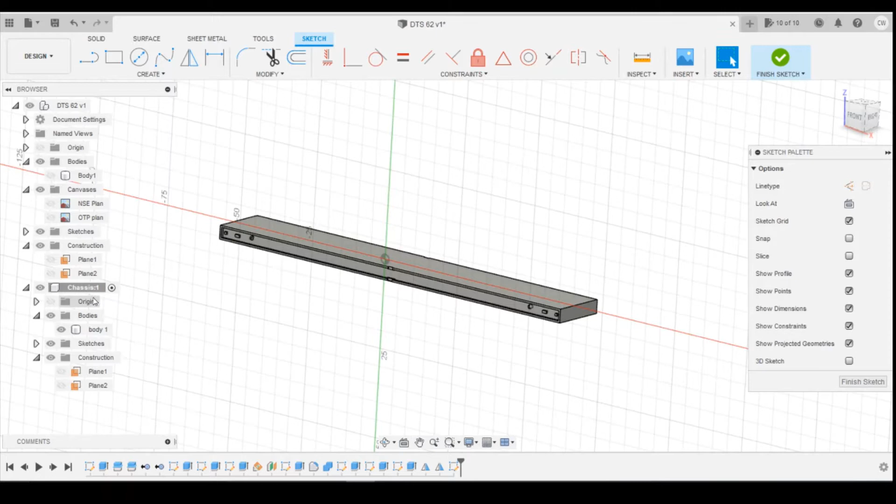and a number 2 end because the two cabs are slightly different sizes. The first thing I'm going to do is create two components for the two cabs. I'll check the radio button to make sure we can back up to the top, right click, new component, and name this number 1 cab, and click OK. Then I'll come back up to the top and do exactly the same: right click, new component, number 2 cab.

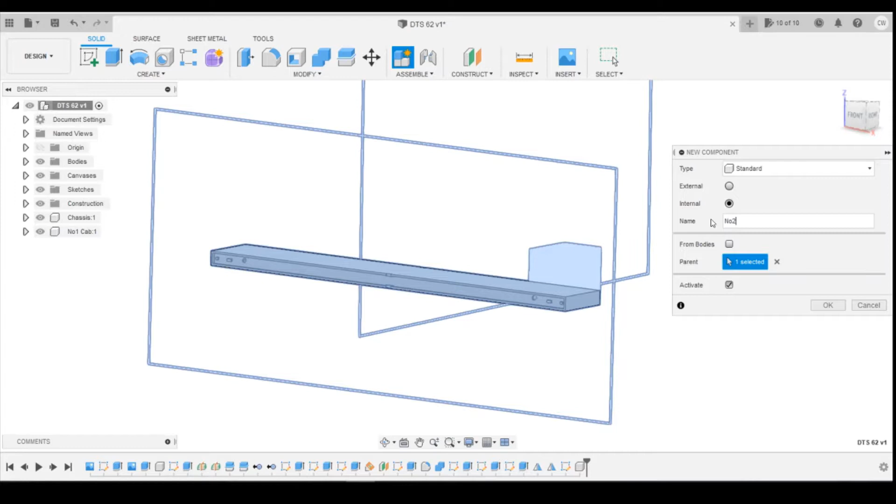Okay, so now we've got our two cab components. We can start making sure we're drawing the correct ones so that we know we're on the correct end of the unit as we draw it.

If we look at Paul's sketch, on the number 1 cab we've got 98.5 inches from this end of the cab up until the end of the buffer beam here. And on the other end we've got 71 inches, again from the end of the cab to the end of the buffer beam. So we've got 71 and 98.5 - those are the two measurements we're going to be working from.

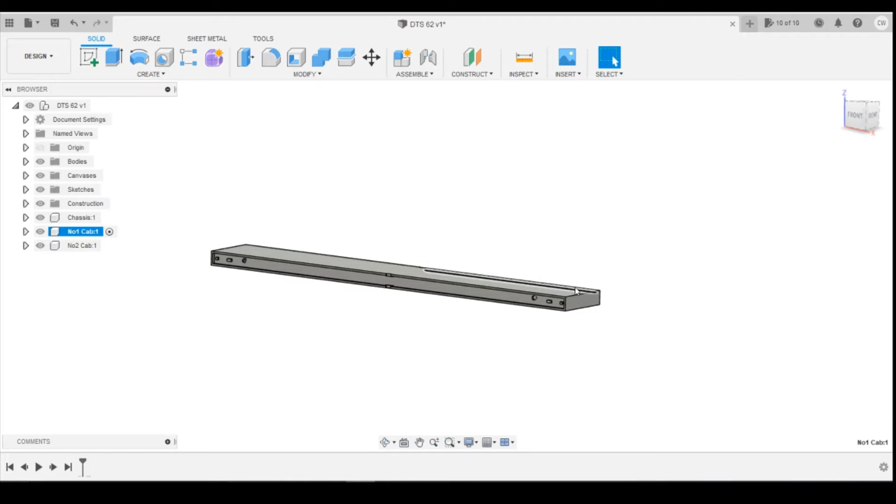So using the number 1 cab first, we're going to draw it on this end of the model. We're going to have the canvas turned on for the side-on view and make sure you've got your number 1 cab radio check button selected.

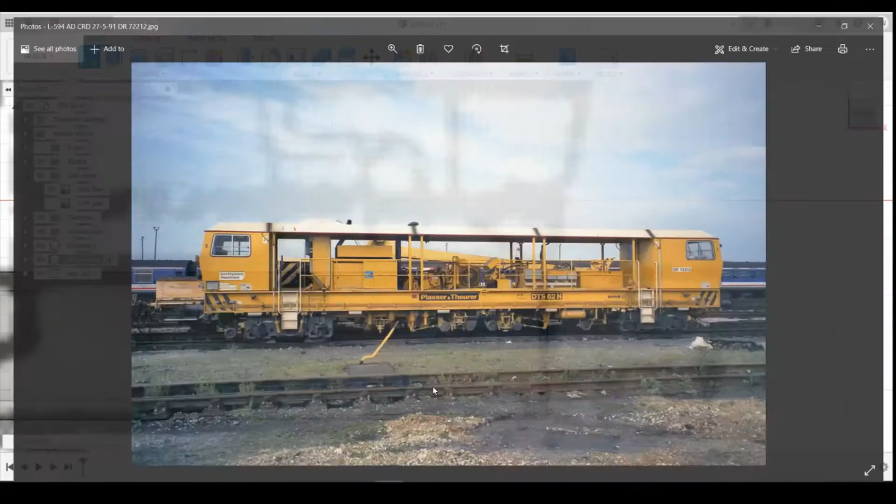I'm going to create a new sketch and zoom in, and we're going to sketch on the outside of the sole bar here, because if you look at the model, the cab is pretty much level with the outside of the sole bar.

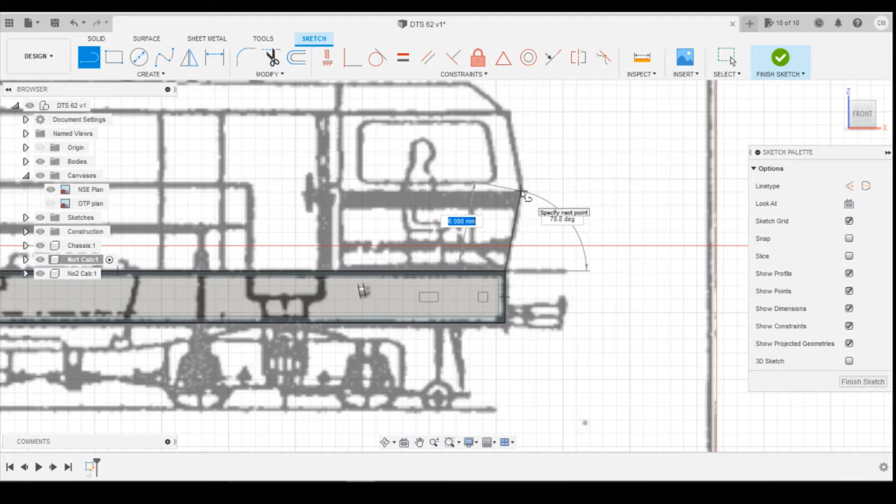We'll create a sketch there and then trace around the outside. We're going to start in this bottom corner - there's no overhang really on the front here. We'll come up to the point of the cab, which is about there, and then come up to the next one.

Try and make sure these blue lines are snapping. I try not to... although if we have a look at the side-on view, I don't know if that is potentially level - that point there and the 2 point, yeah, I think we might draw that as in line with the end of the buffer beam.

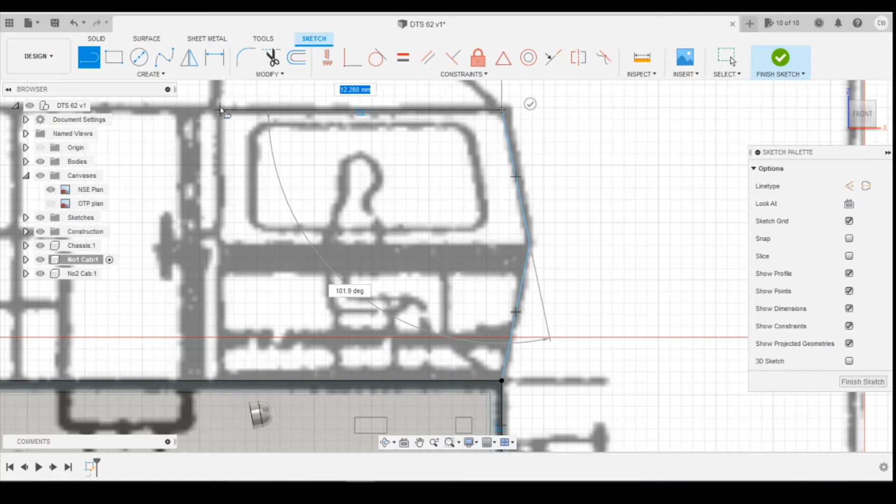Okay, and then we'll draw this line down - it'll automatically snap to the bottom there. And then you can see how that's automatically closed off because it's changed colour. I'm going to define that angle, and then define that angle, and that will close those two parts off.

And then if we look at the plan, we can have a look around to see - so we've got 35 inches, which is pretty much the halfway point. Looking at that, that point is at the halfway point.

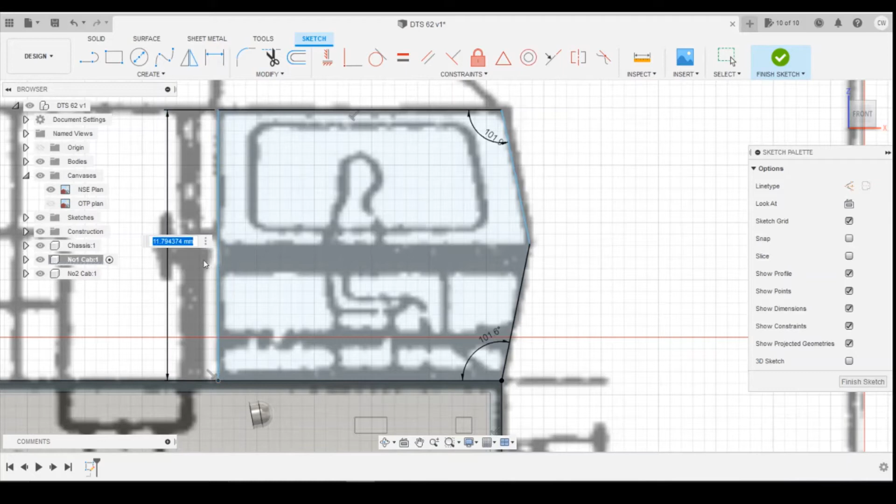So how we can change this then is if we define this edge - we know that this has to be 70 inches, and we know that from looking at the plan on Paul's sketch here. So we know that's 70, and we've got 35 inches as the halfway point. So if we go into our calculator tool here, stick 70 inches in,

we know that it's 1778, which is going to be the height of this line. So if we do - what was the number there? 1778, divided by 148 because we know that's the N gauge we're working to. So you can see how it's lifted it up slightly.

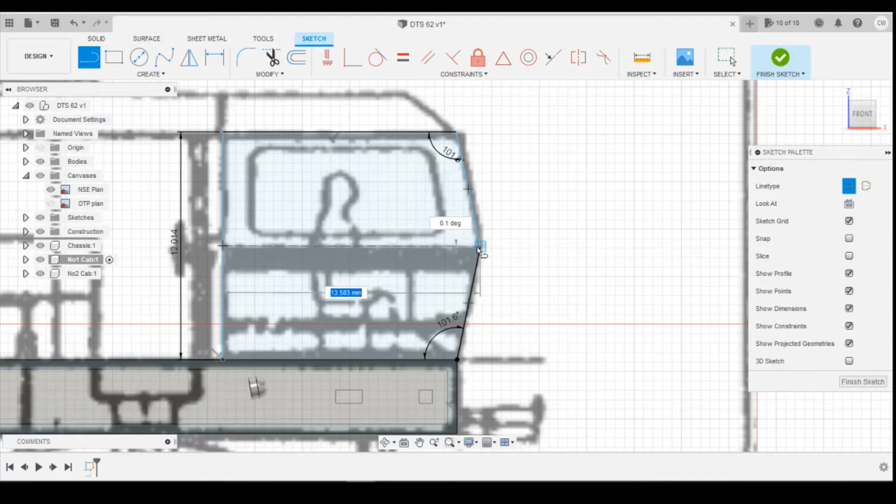Okay, what we need to do now is find the midpoint. I'm going to draw a line as a construction line across, and you can see that pretty much we've got that point spot on, maybe, by the looks of that.

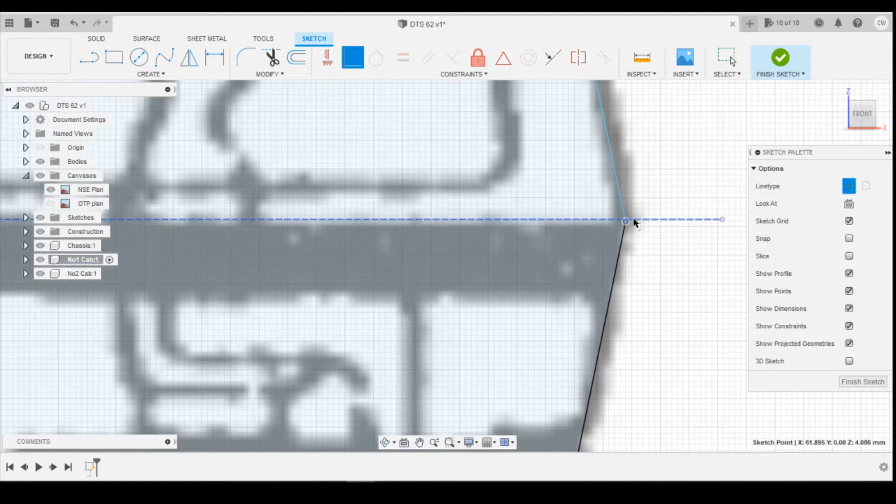Okay, and what we can do is constrain that point to that line, so that point now is at the midpoint. All we've done there is turn this into a construction line and then added that onto the midpoint there. We can finish that, and change that back out of the construction line.

Okay, so we're looking at the number one end, so we need to look at the measurement here - we've got 98.5 inches as the defined measurement from the end of the buffer beam to the end of the cab. So if we check this again, it's 50 plus 41 plus 7.5, so yeah, 98.5 inches.

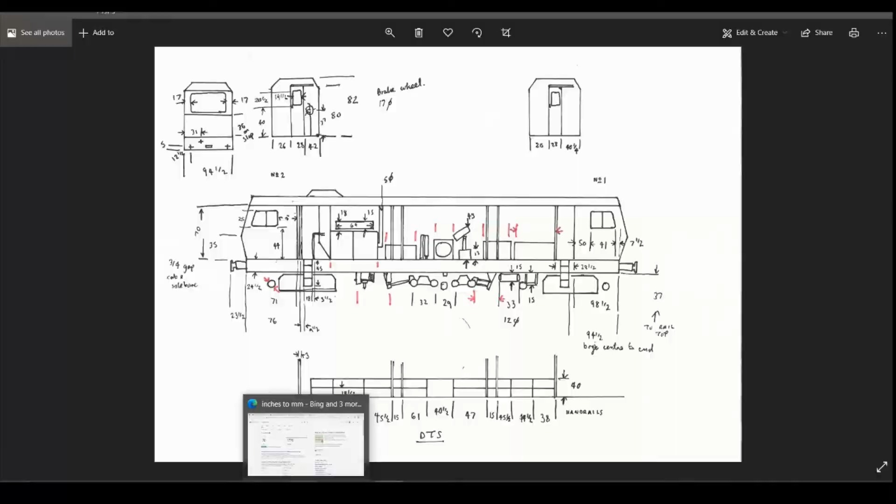So again, we can jump in here - 98.5 is 2502, near enough. We can define the length... let's escape that. We're going to draw a line along here just to close that up, and then we can define that length - sorry, what was that we said? 205.2.

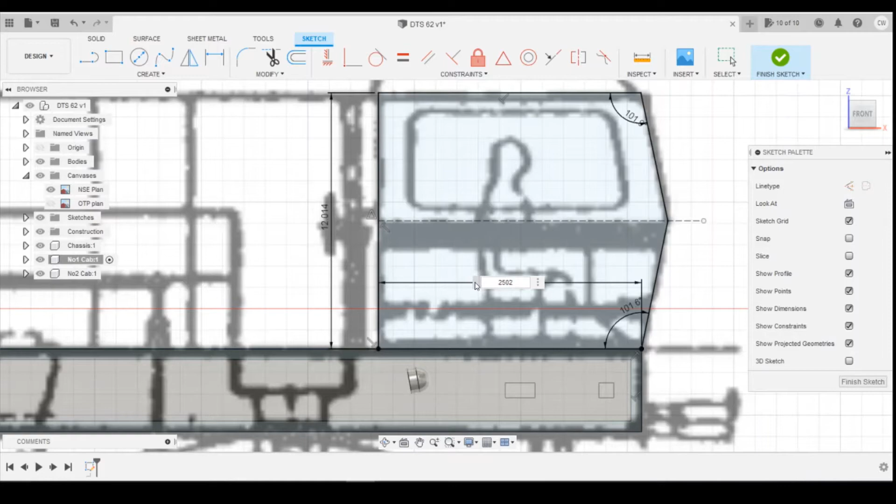Okay, you can see what that's done to the length of that cab now. And that doesn't match the plan at all, which is a little bit annoying, but these are things that are sent to try us.

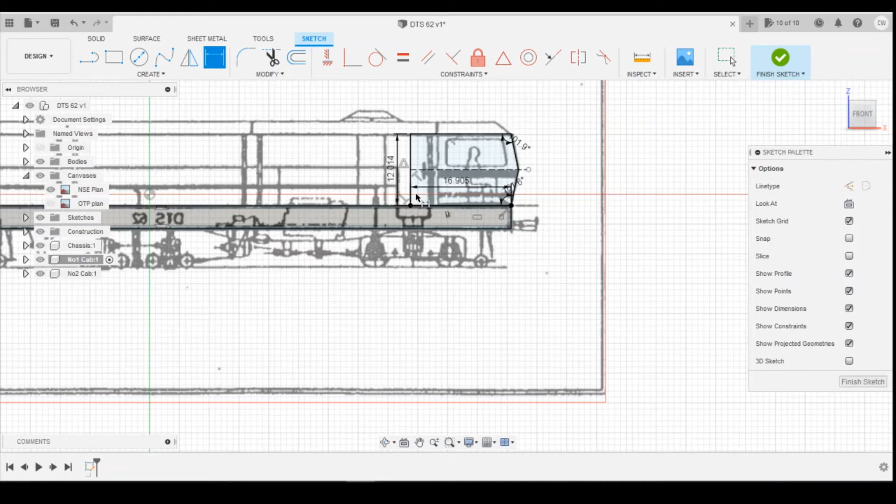We do know that it's pretty much in line with the center point of the axle here, and this one's got a center point there. So you can tell that's not going to match the plan, and there you go, that's the center point of that axle. Let's just have a quick look.

One thing we might want to do, if we finish that sketch a second, I think this plan might be the wrong way around, looking at where that hump is, because that hump on the roof is above the engine.

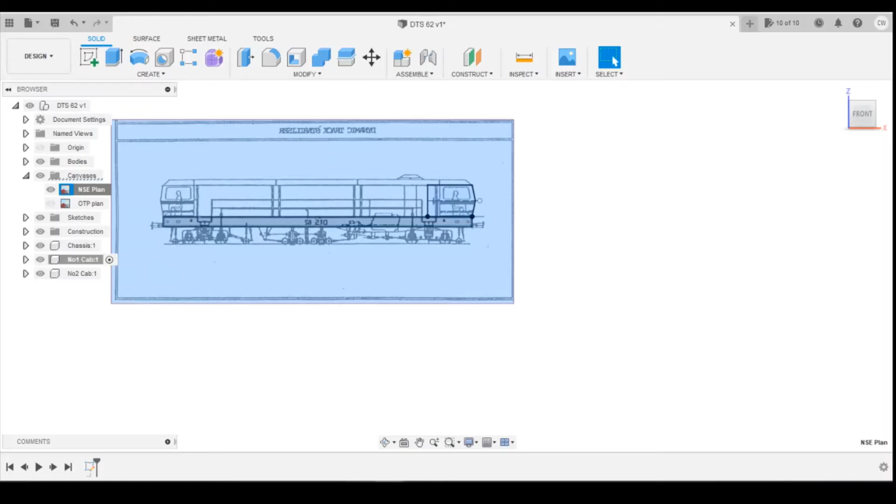We go into the plan, edit canvas, and we can flip it round. Again, I don't think that's going to make much difference looking at that, because the cab doesn't finish in the right place on there. So I'm just going to leave that as it was this way round.

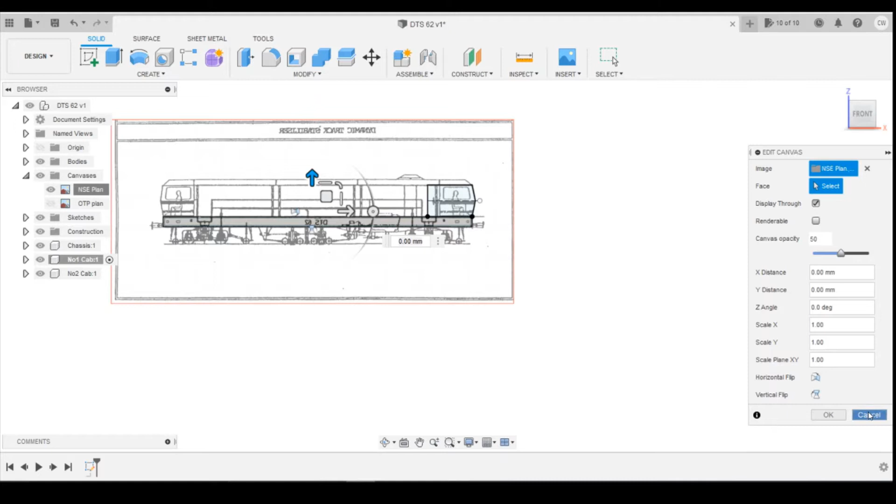So we've got our profile now for our cab. We can extrude that, and we're going to extrude that across to the other side of the chassis here. Okay, needs to be a new body. Make sure you're not joining into the chassis unless you really, really want to. But at this point, I would suggest that you don't, and we keep that as a new body.

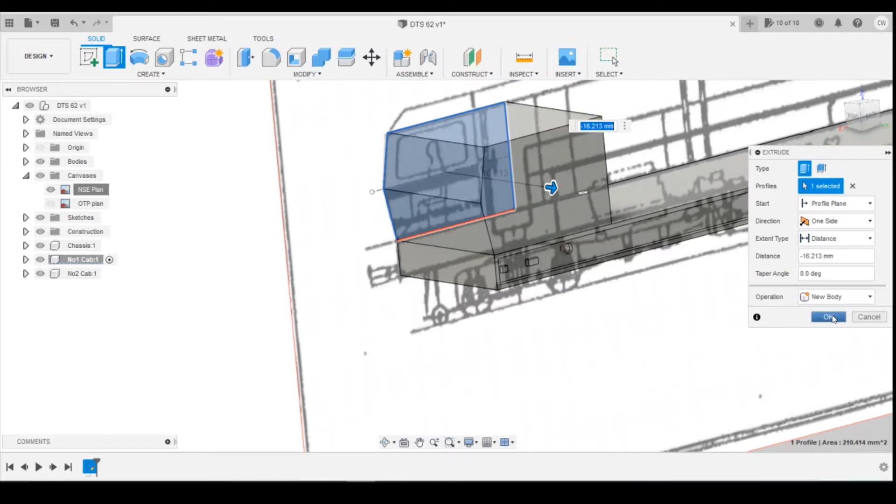Okay, so we've now got that cab there. What I'm going to do is copy that into component number 2, or cab number 2, and then change the length of it. So if we open that up, select the body, right click, and then move copy.

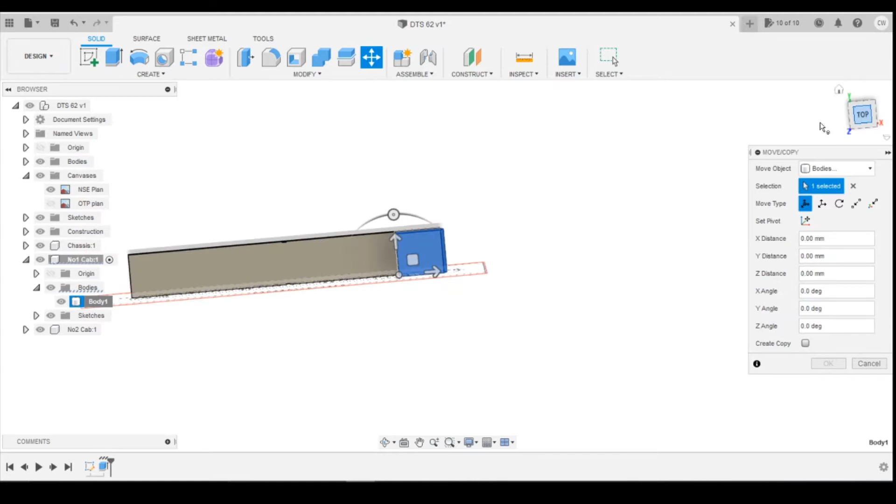The first thing we're going to do is... oops, let's undo that. Create a copy first by ticking the checkbox there. Spinning it round. Let's put it in there. Let's spin it around, move it, and then we'll try and move it across into this component here.

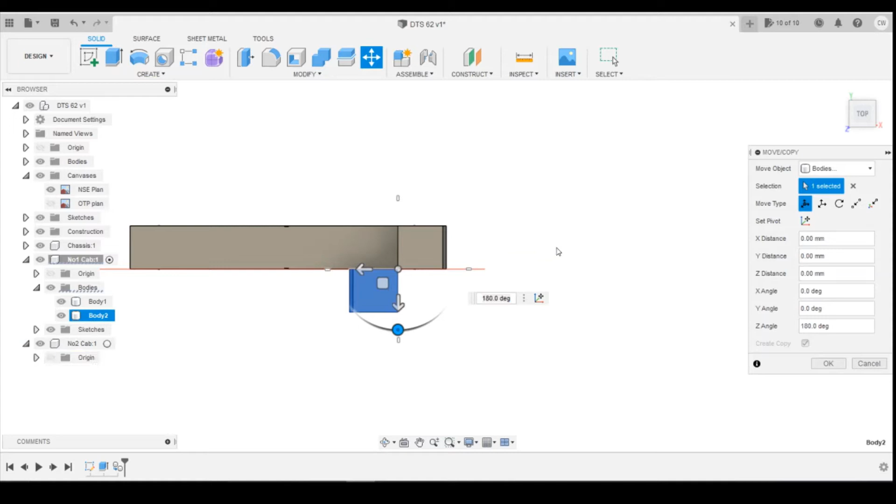No, let's not do it that way. Let's go right click, copy, come down to here, select that, right click, paste. Now we've got the body within that one. That's what I'm after - probably the cleaner way to do it.

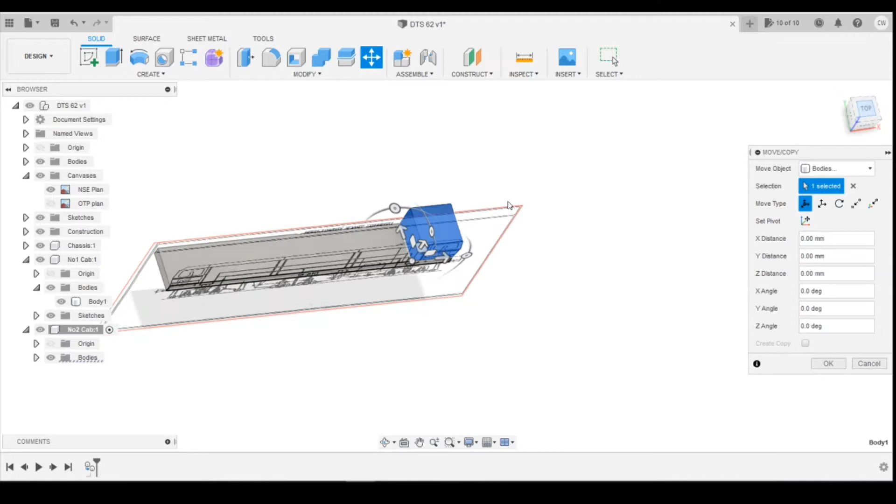So we can spin that round 180 degrees, so it's now the correct way around. If we turn the canvas off, what we can then do is point to point, select this corner here on the cab, and we know that's got to match up to that corner on the chassis. Click on OK.

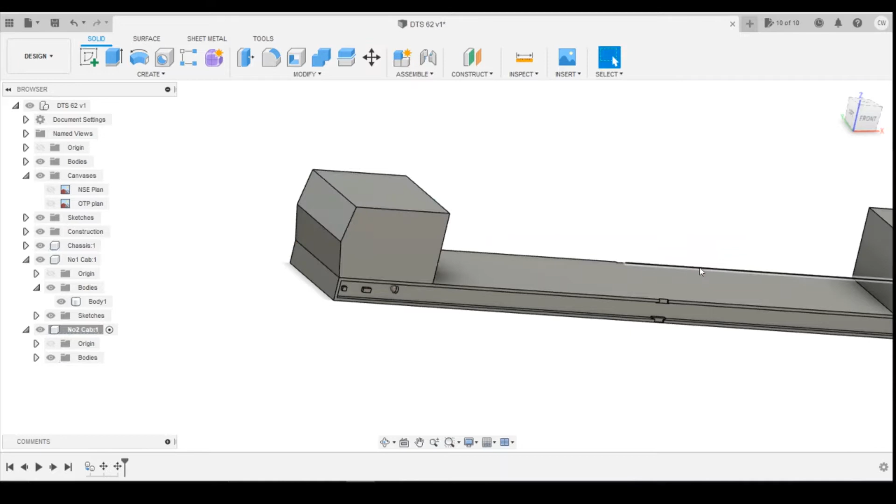Okay, so what we now need to do is define the length of this, because we know that this cab is a completely different length to the original one. This one is 71 inches. So if we go back into here, do 71 inches, it's now going to be 1803.

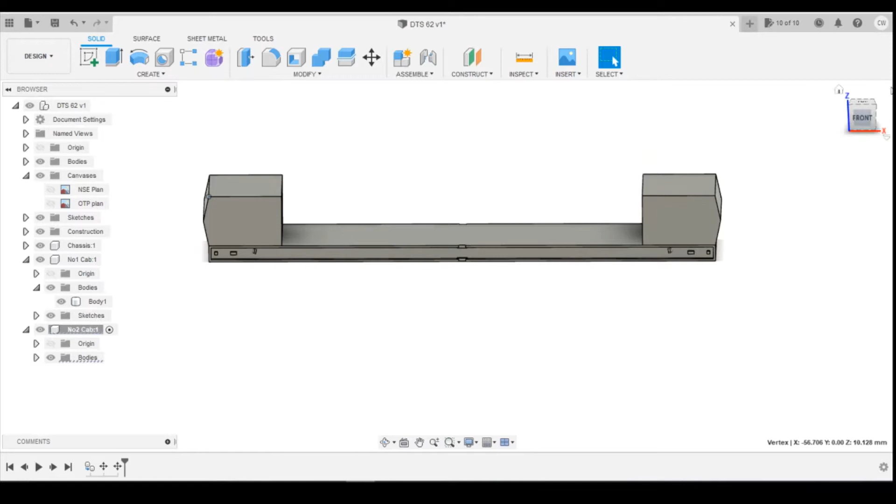So come back into Fusion. Okay, I'm going to turn off cab number 1, I'm going to turn off the chassis. I'm going to create a sketch on the top of the cab, and we're going to do a rectangle.

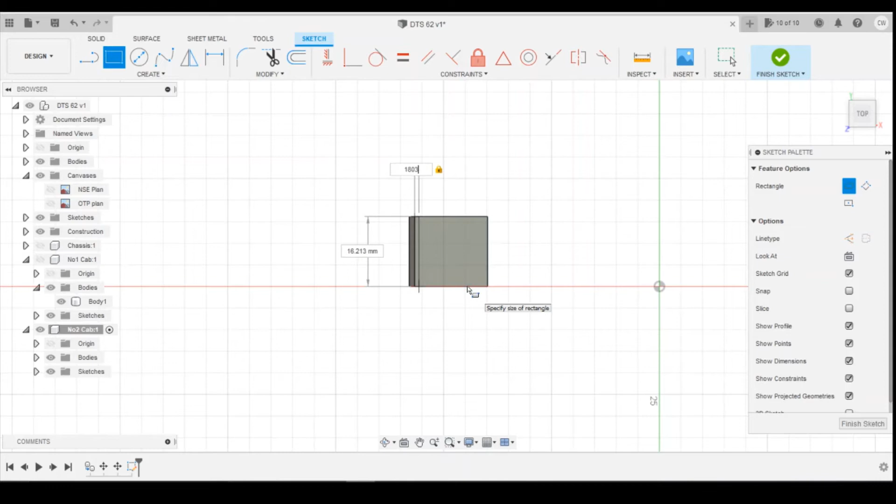Okay, and we know the length was 1803 divided by 148. Okay, width is already going to be snapped to the other side. And what we've got left, this extra bit, we don't need, so we can just extrude that through to the bottom side, get rid of that, and we've now got a cab that's different length on this other end.

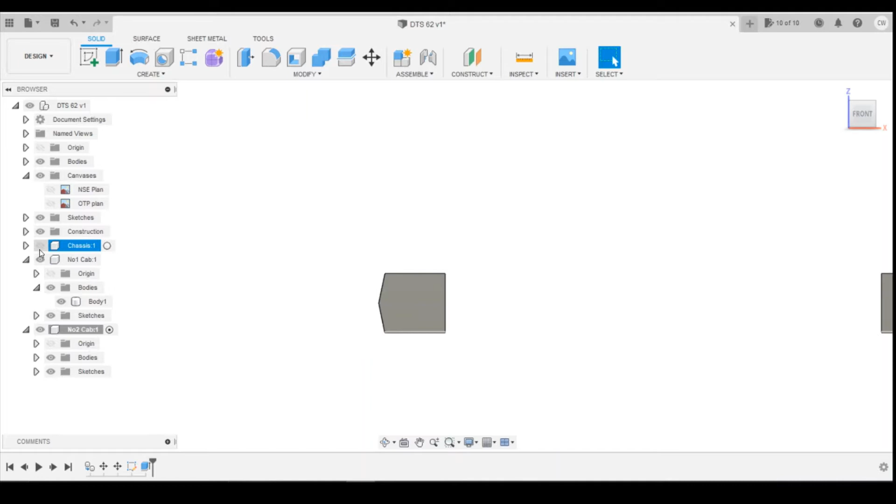Okay, if we turn these back on, you can see we've got our two different length cabs, which is exactly what we're aiming to get.

I was thinking, I'm wondering if it's worth going back a little bit in the CAD and just changing how we've done these cabs - like keeping what we've got, but just maybe adding things like the windows and detail like that. It will mean that this cutting off the end might be slightly different, but we can get around that.

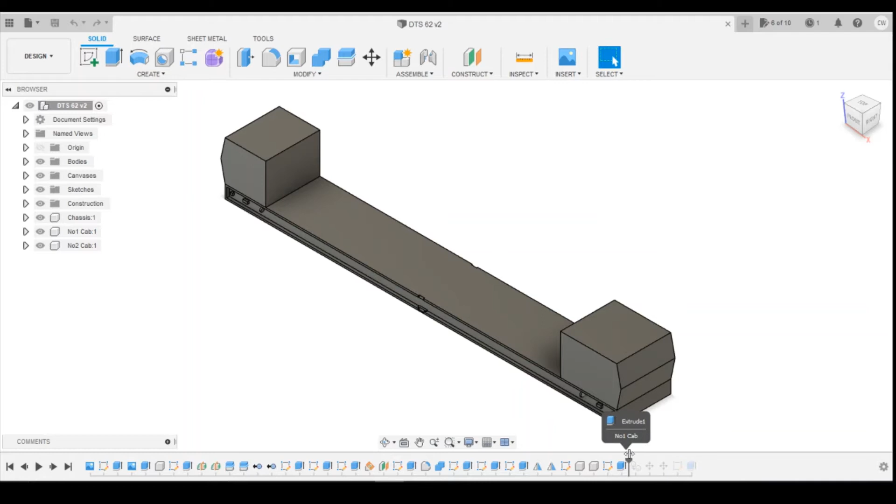So let's go back in the history, let's turn the chassis off because we're not going to need that, and we'll make sure that we've got cab number 1 turned on.

I think let's go for a shell on the bottom surface. Let's give it a wall thickness of 1mm.

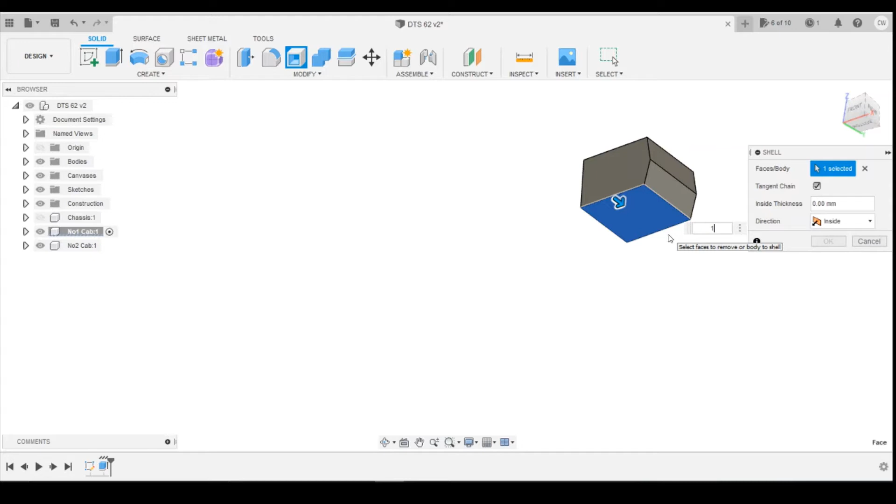And then I think I'm also going to... no, I'm going to keep that roof, I think. Okay, so we've got the shell.

What we can do now is draw the cab side windows in. So if we look at these measurements, we'll do that with a combination of pictures. Let's have a look at the cab windows.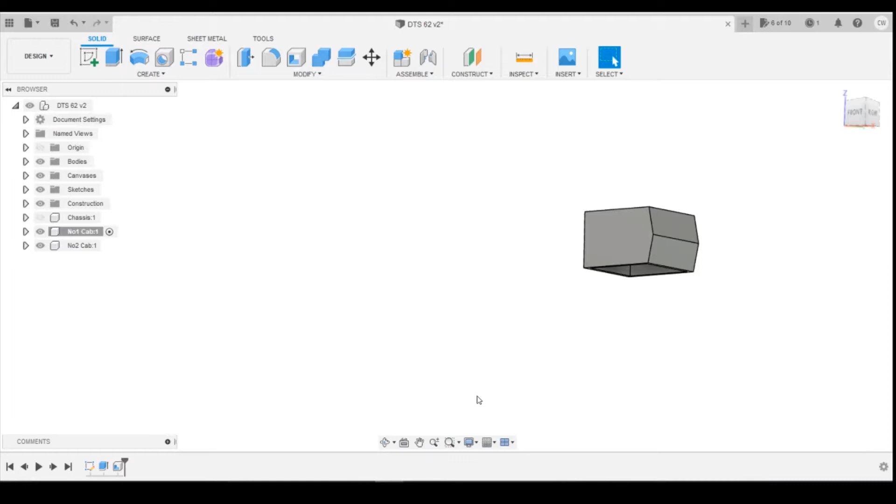So we can see that we can start off with probably a basic rectangle and then put an angle in on the side here and then curve the corners round. Let's have the canvas on, that'll give us an idea of where the window is.

Okay, so let's start a sketch on the side wall here, and we'll just put a rectangular shape in to start with.

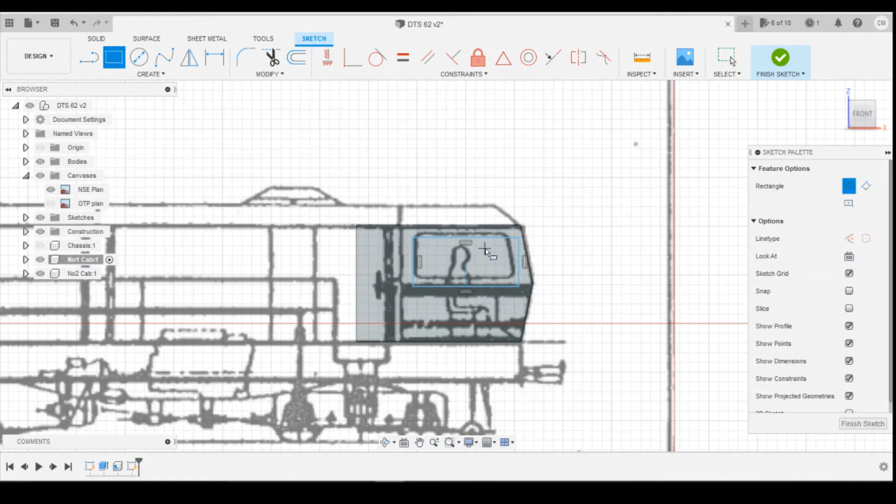Okay, so height of the window is 25 inches and the length of the bottom is 41 inches. So if we jump into our internet here, 25 inches is 635mm. So we can define that height there. 635 divided by 148. And we said the length was 41, which is 1041.4.

Okay, so we've got 4.291 up on the height and 7.036 there. So this has got 50 inches from the end of the window to the back of cab. 50 inches is 1270.

1270. Okay, so that's the position of our cab, which is massively different to what the plan is, but to me that plan window does look really, really big.

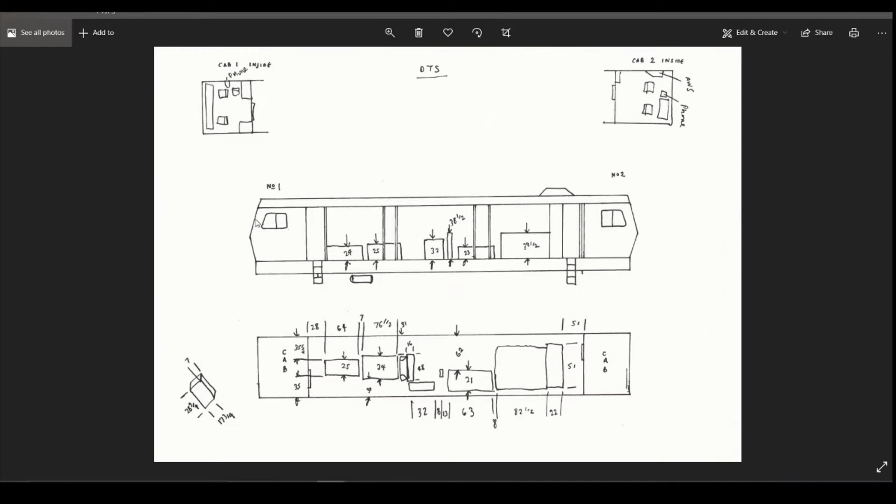Let's have a look at angle here, see if we've got anything with a draw. So it's got to have parallel lines with an angle. Yeah, okay, that's the line's got to be parallel.

So if we draw a line from there up, make sure it doesn't snap to anything because you don't want it to. You need to now go and click escape. We can then select parallel line, that and that, so the two will match there then.

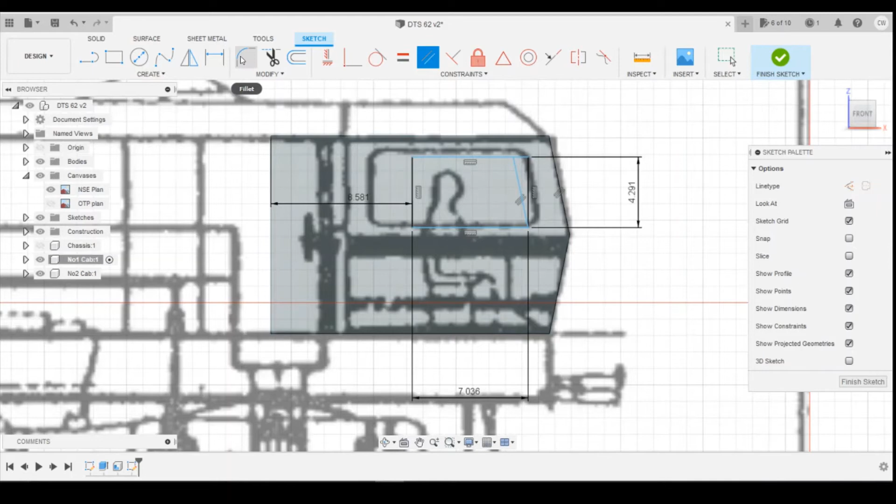Now if we look at the photographs, you can see that all four corners are curved, which is helpful. So we can just do the fillet, they look like they're all curved the same. So if we hold shift down as we select... okay, so we're going to curve them.

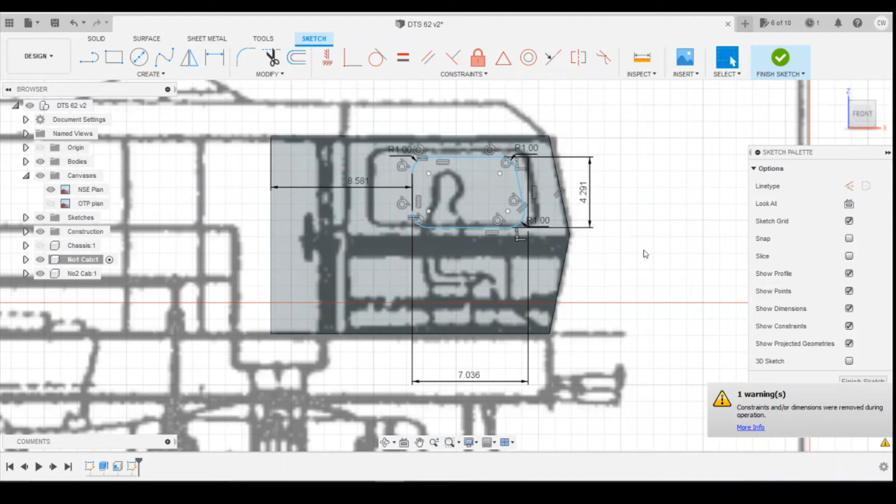I think I'm going to go with that 1mm, it's just giving me the option of. Let's work with that. So we're going to curve from there to there, 1mm, and curve there to there, 1mm. Okay, so this warning here is because we've curved this, so this constraint no longer matches to the end here. Just try and work out whether that looks okay, if I'm happy with that.

I'm wondering whether that measurement there is to the bottom corner, from sort of there to there, or from there to there. That one's definitely 50 inches, so that's fine. It's this gap here.

Let's have a look. If we do a dimension from there to there, it's telling us it's about a foot. Does that look about 12 inches? Maybe not, maybe it's a little bit smaller. It's difficult to tell, really.

Need to work out the height here. Let's see if that's on the plan. That's why it's not constrained. So 44 inches, I think that says.

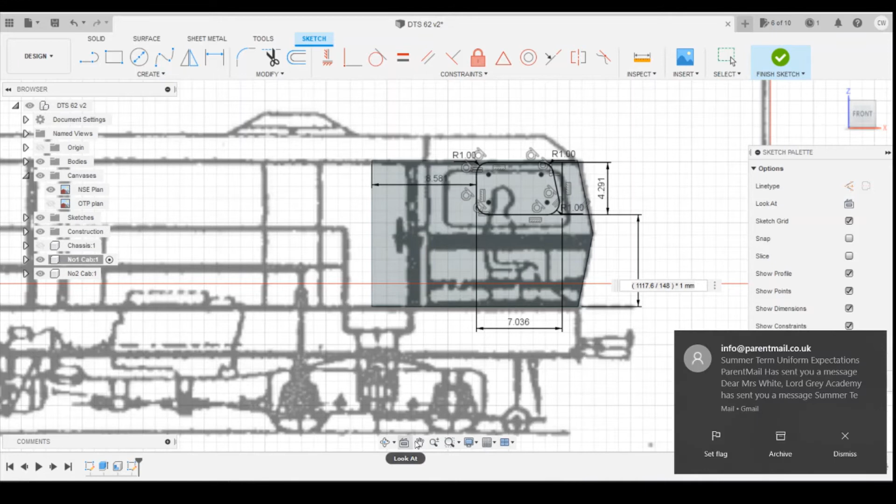1117.6. So there. 1117.6 divided by 148. Either something's not right there. Yeah, something's not right there. That can't be 44 inches.

Right, let's have a look, try and work it out from maybe this door. So we know that's 40 inches there. See if we've got any photos that sort of show. Yeah, look at that, that's exactly the same height. So let's try working that out.

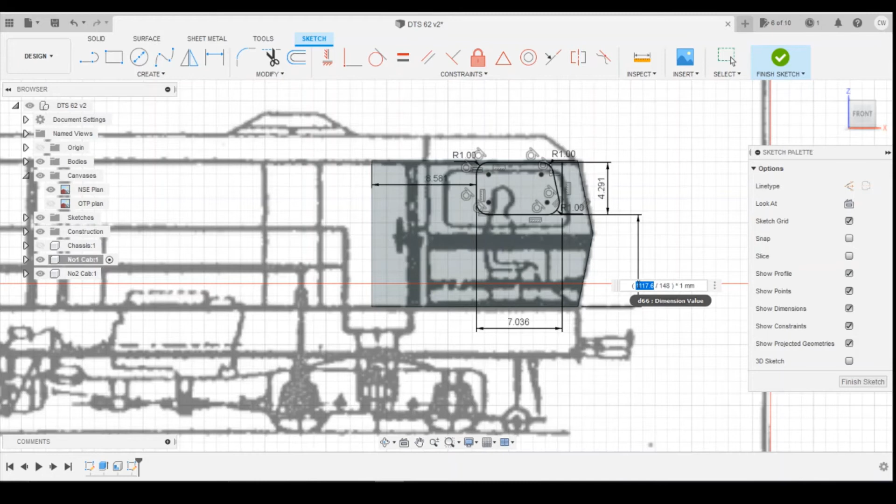Let's try that at 40 inches, so that's 1016. That looks better to me. I think that measurement on the plan was wrong, because that looks like a much better position there. I think I'm going to go with that as my position.

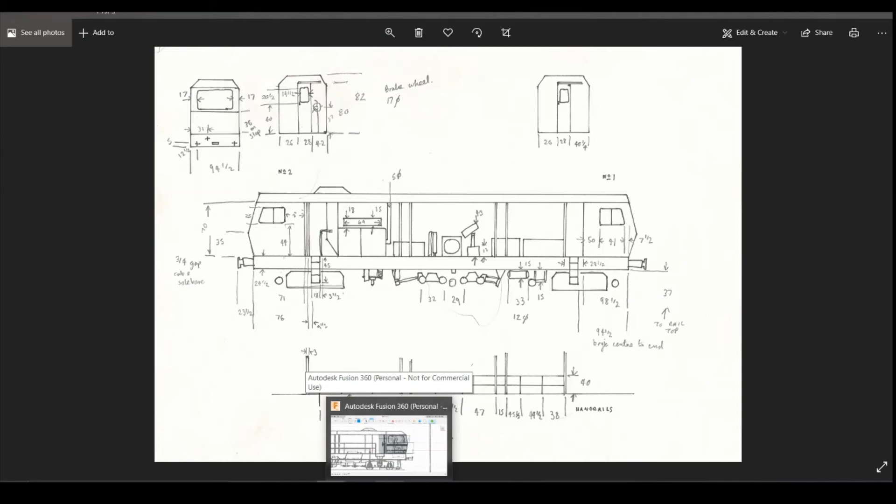Now, again, looking at the plan, all the windows are identical. So what we can do to make this nice and simple, we could put these uprights in there. Yeah, let's do that. Let's have rectangle.

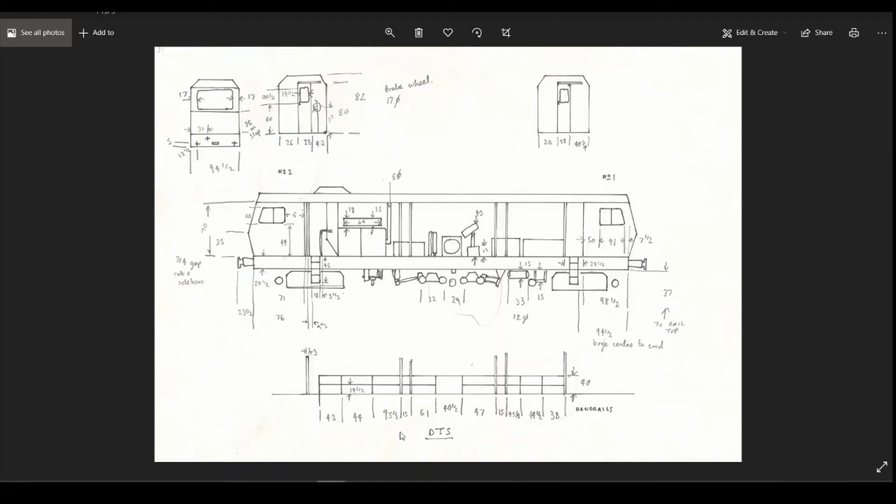I don't want the middle constraint. Although there's no measurements of them, I can see there's no measurement of where it is. If we look at the picture, it's probably in the middle of the top, not bottom.

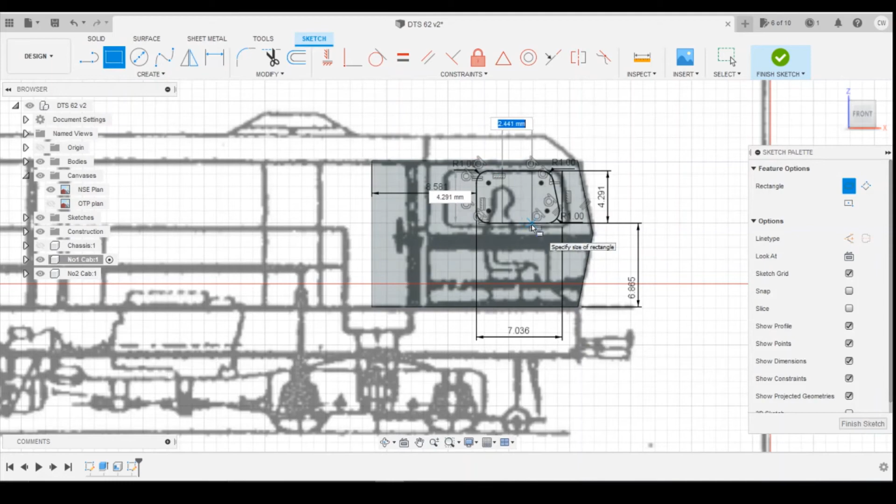So if we draw a rectangle, quite a large one, and if we use the midpoint constraint, constrain that to the midpoint of the other one, and then when we define this, I'm going to go for 0.5 millimeters in width. That's going to put this midpoint of this rectangle on the midpoint of that upper level.

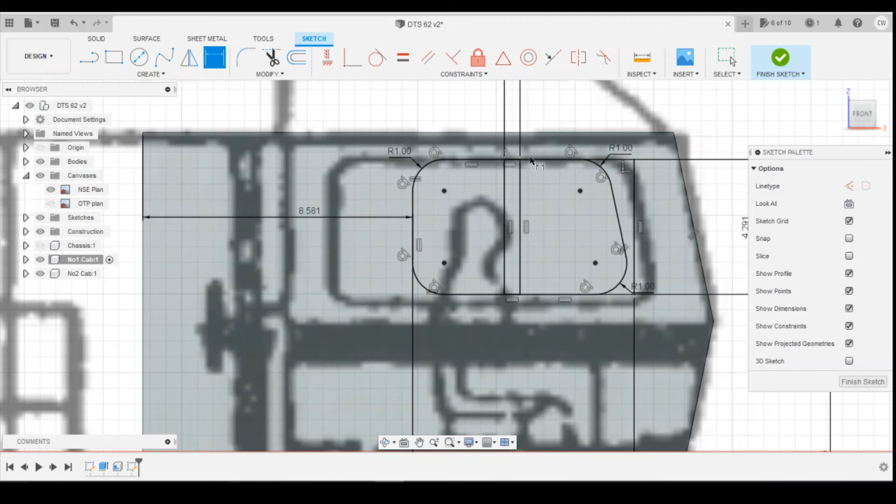Then we can select those two panels and extrude them. And if we come all the way to the other side, that will cut all the way through the model.

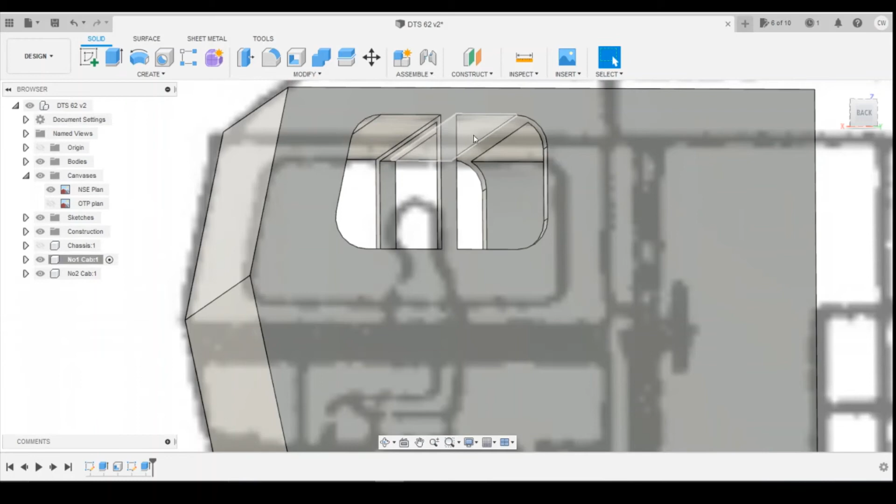Okay, so what we've got here is, because we've got a millimeter shell thickness, this actually cuts slightly into the roof, which is fine, we can live with that. I'd rather not, but we can.

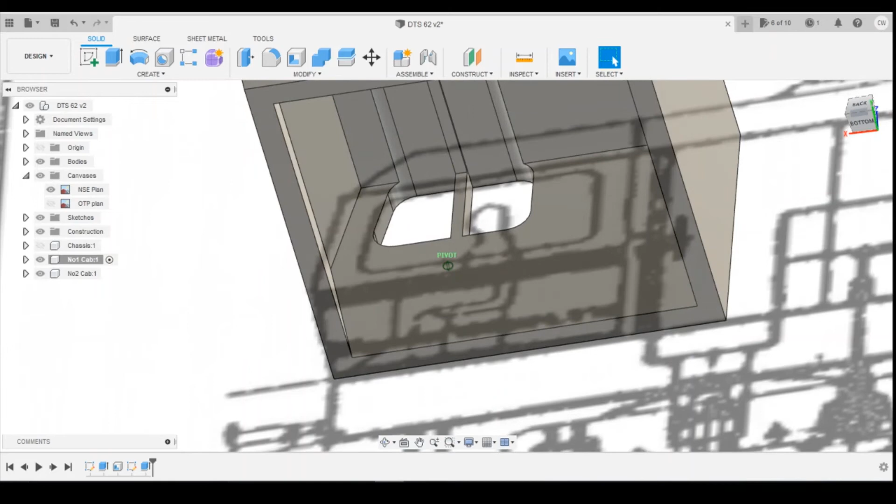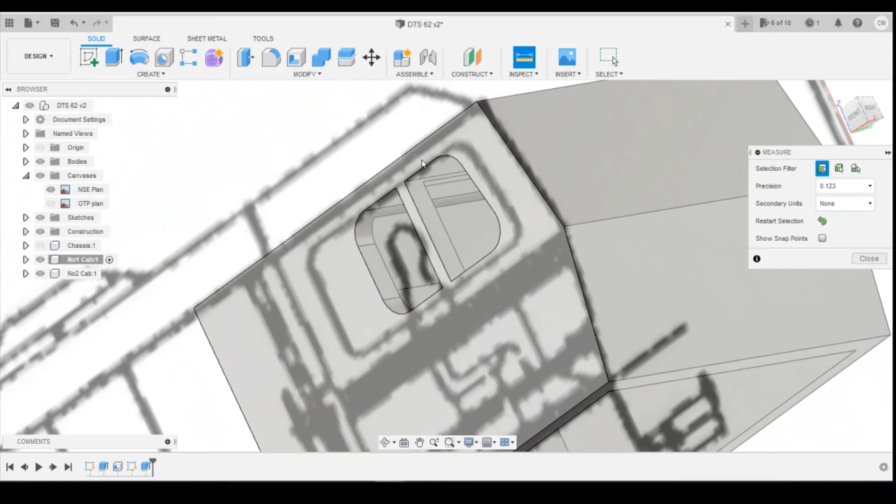The problem is, if we do anything about it, it would show through the window. We could make the wall thickness smaller, but that would risk the integrity of the model, so I'm going to live with that. You won't notice it again, but it's on the inside. Let's measure the distance from there to there - 0.1 of a millimeter. So yeah, you're not going to notice that.

Okay, so that's the cab window done. We're now going to need to do the cab window on the front. Let's have a look at the picture here.

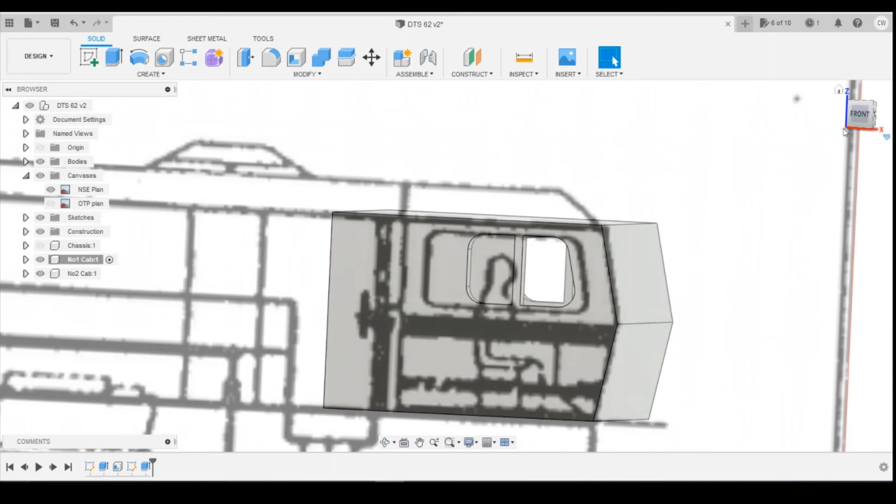Now, if we were to draw it directly on the front panel, when we extrude in, it will extrude in at an angle, and then your framing would be showing at the top, because you'd have the back of the panel showing downwards. So if we create an offset plane and extrude directly in a horizontal line into it, then you don't get that effect.

So if we do an offset plane off of the back wall here, and then drag that beyond the front of the model, click on OK. We can then draw directly onto that plane, which is then going to be based directly onto that model.

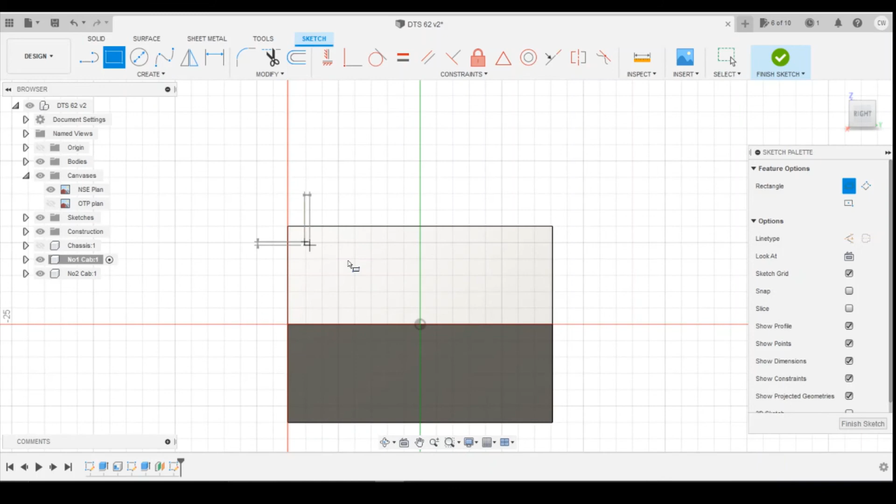Okay, so if we look at here, we've got 17 inches either side. So if we could draw a rectangle like that, and then we want 17 inches, which is, let's go for 432 millimeters. So we can define the width.

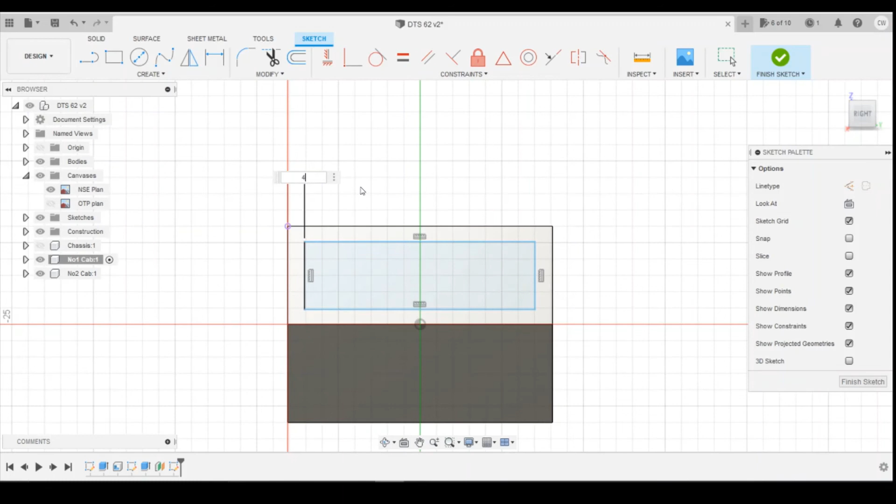We're going to have to do from the corner to the corner. Say 432, so it's 432 divided by 148, that's 2919. Drag that back in. Define from there, that corner to that corner, as 2.919.

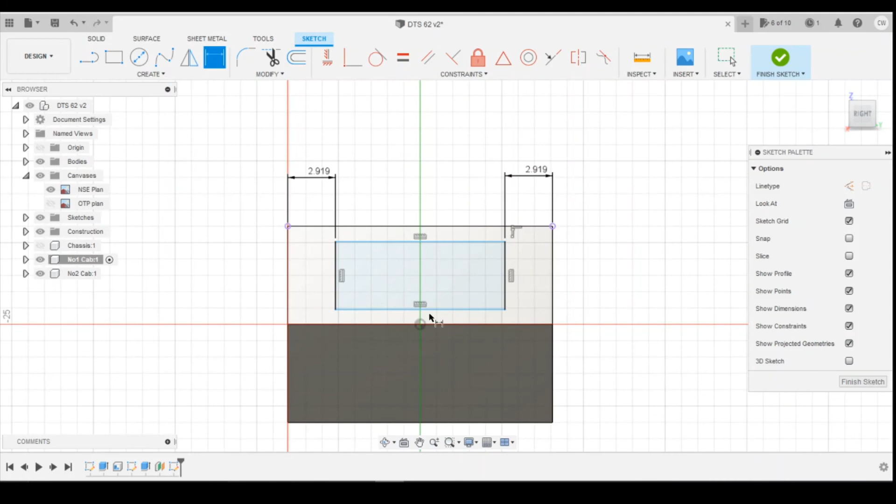Okay, height wise, do we have any measurements for the height? There's nothing on there. No, okay, so let's look at the pictures.

So that's pretty much going to the roof and only just above the crease, which we know is 35 inches. So I'm going to define the corner to corner. I'm going to give that a thickness of...

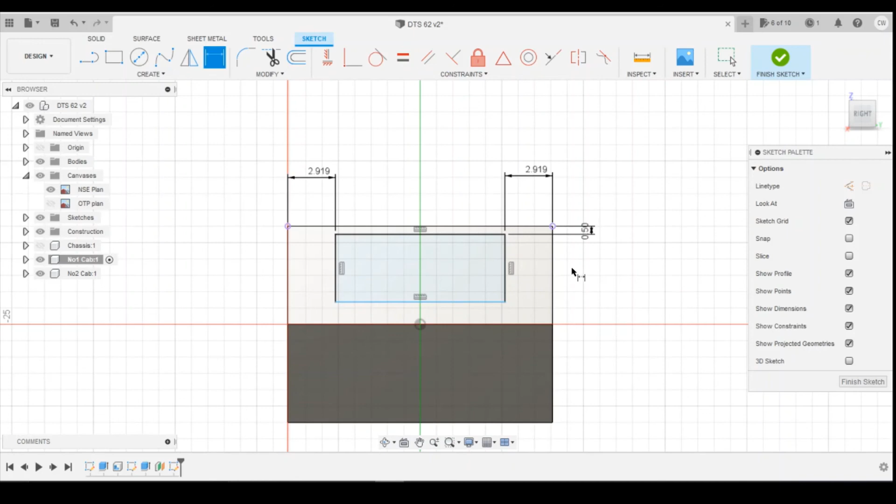Let's go 0.5, and from there... that's going to look okay. Lower actually.

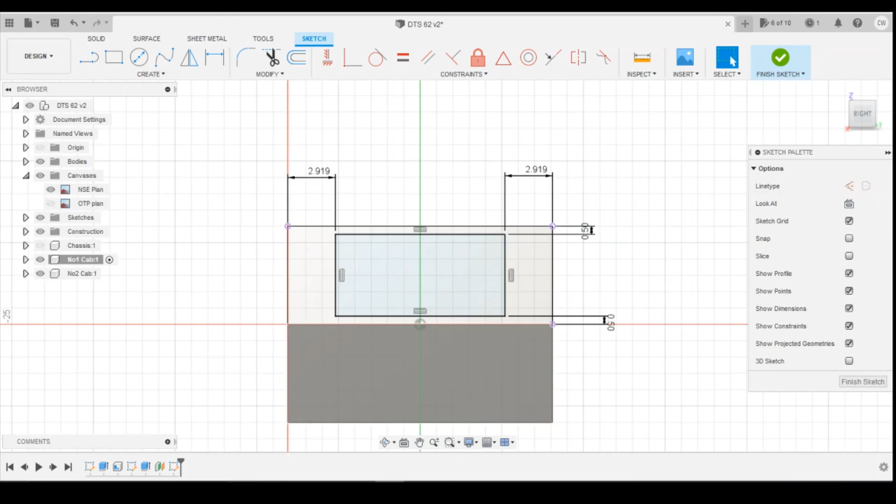Okay, and let's have a look. Are the corners all rounded? Yes, they are, so we can add that in. It's going to throw these constraints out, so I'm holding shift down as I select these corners. 1mm again looks okay, and then we're going to extrude this into the model.

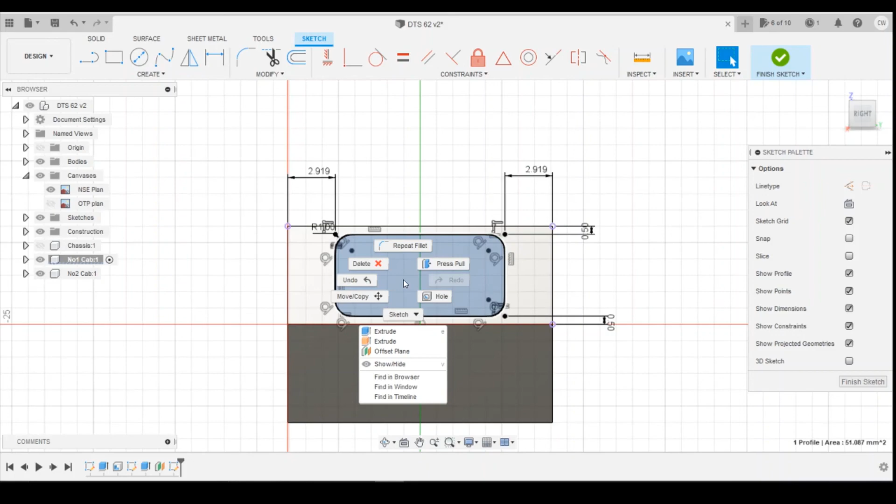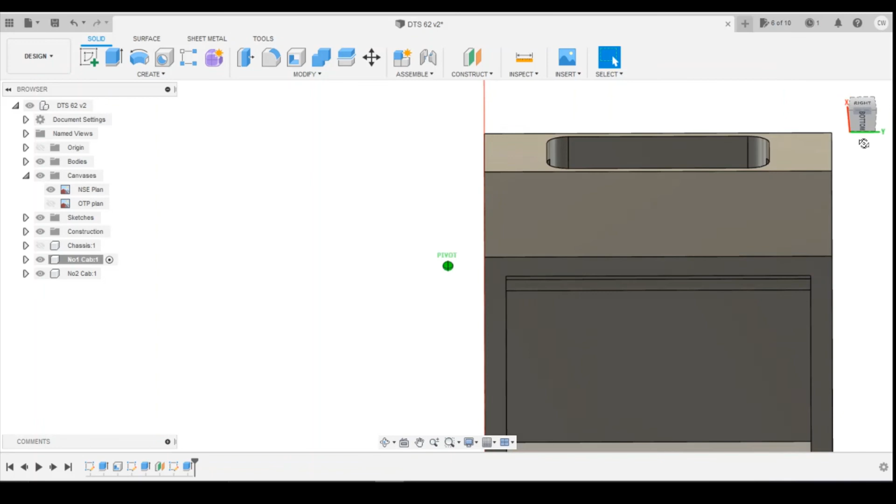Okay, so we're going to have a similar issue with this top surface here. So all I'm going to do is edit that. I'm going to drag that back a little bit further so it actually cuts into the same profile that the top... is that a hole all the way through?

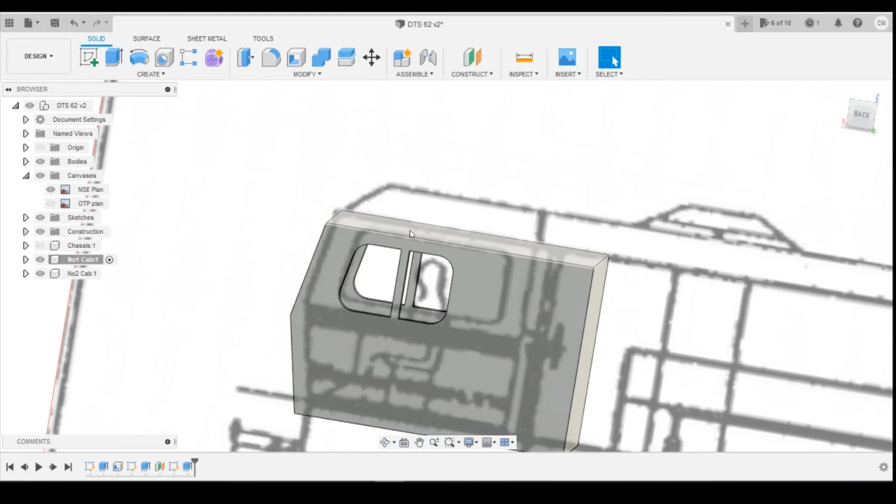No, it's not. So we've now got that cutting into this profile as well now, and that's significantly cutting into it. We know we've got 1/2 mil thickness here, and when we go, we could potentially put the roof on there, which gives us more, and then we could fill these out if we needed to.

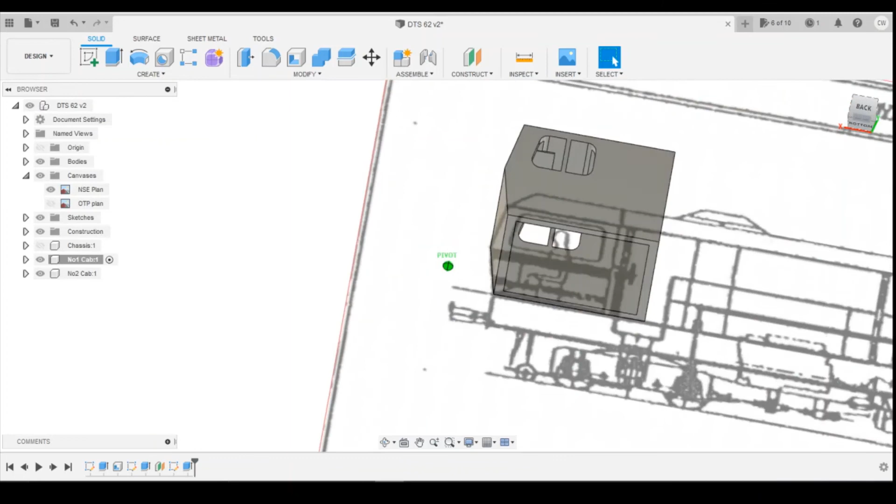Just wondering whether I want to go back and change that roof thickness now. Yeah, I think I might do.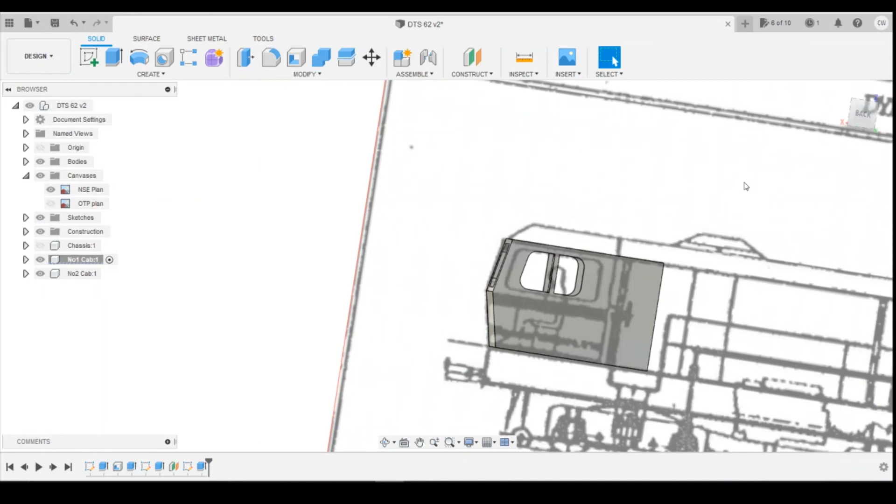If I just scroll that back past the shell, in fact just after the shell, we can extrude that roof upwards -0.5. Then when we jump forwards, we won't have or shouldn't have that effect. No. Does mean the roof's only 0.5 thick, which is fine. It can print that, it's absolutely fine. Yeah, that's probably the best option.

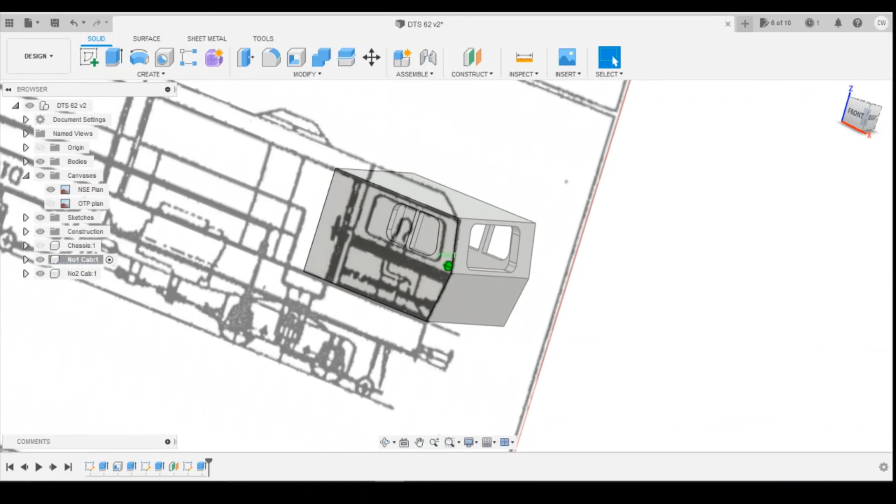Okay, so now we've got the windows drawn on there. If I show you what now happens, if we come back up to top level and jump to the end after the copy, you can see that the windows have automatically copied over, but now we've got this gaping hole which we can fill in afterwards, which isn't a problem.

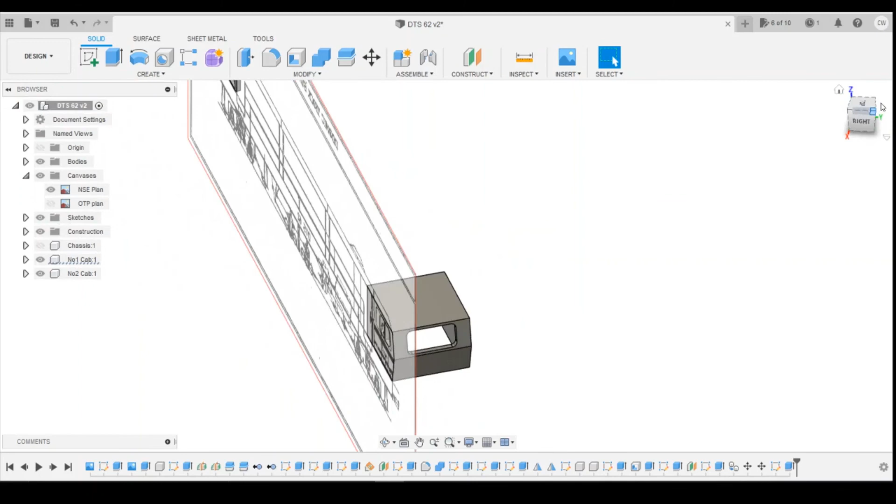Okay, so I think having got to this point here, I'm going to finish that lesson. We've got our windows on, we've got our basic shape for the cabs. That was the objective of today's lesson, and we'll come back and do a bit more work on that in the next one.